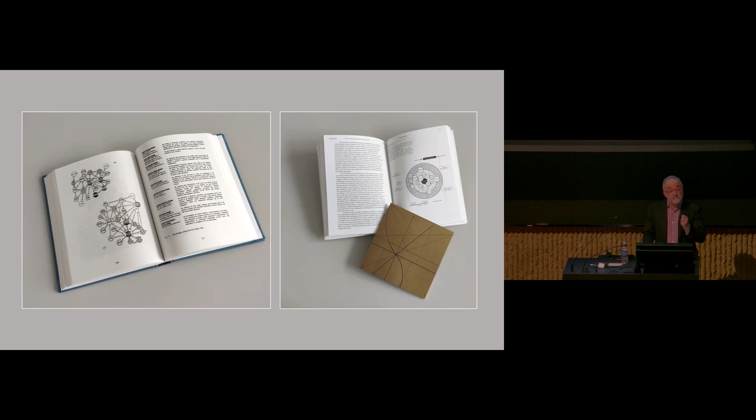So while closing the loop that I opened 30 years ago, I really want to take this opportunity to thank Gordon Smith, I think a kind person and a true patron of academia, who's also responsible for my being here today, not only because of the sponsorship of the event, but I think through the generosity of spirit that he has shown in other seasons of our life. So thank you very much for what you've done for me before this event.

Now, we go to today's event, the anniversary of the Sydney Opera House, 50 years since its opening by Queen Elizabeth. And I'm going to use these 3 nouns, cells, octopuses, and beds, to provide you with a slightly alternative view of the greatness of this building and its significance in the history of architecture and construction.

What I'm talking about is a building that started its proceedings in 1956 after a competition was organized by orchestra conductor Eugene Gossens. That is the rendering of the maquette that was actually provided to the participants in 1956, what Gossens envisioned for Bennelong Point. Jorn Utzon wins the competition in 1957. 1959, ground is broken on Bennelong Point, and 15 years later, Queen Elizabeth II opens the building on October the 20th. So 50 years last week.

Between 1958 and 1973, there have been 3 stages of construction which essentially materialized the building. The first for the podium, 1958-62, the second for the superstructure and the sails, and the third for the glass facade and the interiors.

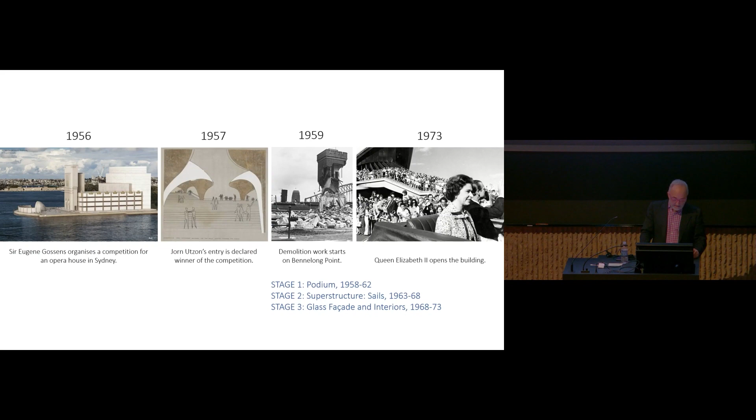Since the opening, but even before then, the Sydney Opera House had really become a very powerful signifier, a very powerful symbol of the country, and actually a mirror of its society, from latest fashion trends to societal events like the latest COVID. And so here you see the Sydney Opera House appearing on the front page of the Sydney Morning Herald during lockdown.

Now, in 2003, the day in which the entire nation was glued to the television because of the start of the Iraqi conflict, 2 social activists climbed the ridge of the Sydney Opera House to write "No War" on the sails. They were later convicted, 6 months in prison, $151,000 in fines, but they said in an interview only that building could have conveyed that message to the rest of the world.

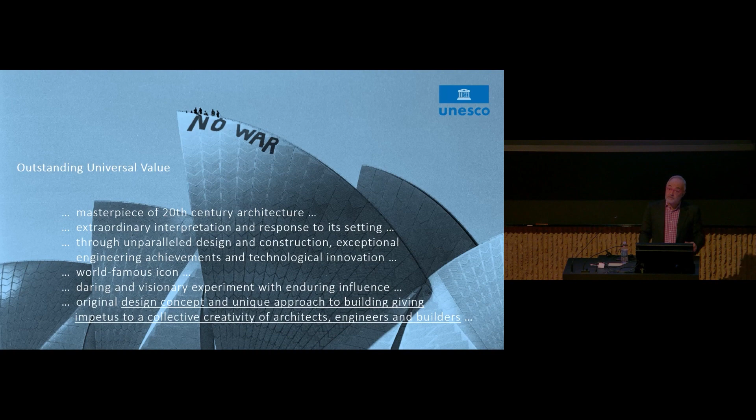So be that as it may, 4 years later, in 2007, UNESCO decided to inscribe the Sydney Opera House into the list of World Heritage Sites. And the outstanding universal value that had to be declared in order to make it worthy of such an honour contains a number of truisms and motherhood statements, but there is a last one which says original design, concept, and unique approach to building that gives impetus to a collective creativity of architects, engineers, and builders. And this was an interesting thing to find in a building which was listed as World Heritage.

Now, if we look at the various protagonists of this story, we have Jorn Utzon, the architect for stage 1 and 2, Ove Arup, the British structural engineer that was the engineer for the Sydney Opera House, as well as the project manager for stage 2. Then Peter Hall, the architect that replaced Jorn Utzon for stage 3, the interiors and the waterproofing of the building. And then Sir Manuel Hornibrook, an Australian engineer and general contractor for stage 2 and 3.

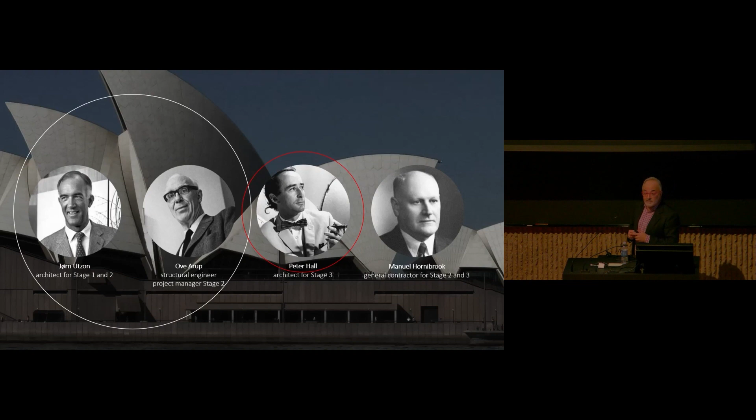If we look at the public history of the building, there is a lot to know about Peter Hall, the architect for stage 3, given his very problematic relationship with the project, and given that he replaced Utzon. But when it comes to the relationship between architects and engineers, it's Utzon and Ove Arup that steal the stage. So they take front stage. There is almost no mention of Manuel Hornibrook. This is a man, a company, that's been almost excised from history.

There is, however, a certain proclivity on the side of architectural commentators and culture to look at the Sydney Opera House, as well as any other building, as a masterpiece, a piece that is the creation of the master. So here you can see the most incredible exemplification of that. This lighting of the sails is something that comes up every year in Sydney, on the Sydney Opera House with laser beaming.

And as part of the annual Vivid Light Festival, there was this drawing that was projected on the Sydney Opera House, which is a fake. And it is a fake because it has Utzon's signature on the right, but in fact it has an Ove Arup drawing right in the centre. Utzon never produced that drawing. And so it's part of this particular paradigm.

Now, the things that we're going to talk about today come from a multi-year research project that I've been carrying out for the last few years with two colleagues of mine, Paolo Stracchi from the University of Sydney and Luciano Cardellicchio from the University of New South Wales, together with other people. If anyone is interested in the literature that we produced up to this point, there is a code there, and you will find everything that has been published.

Now, the problem and the holy grail of this particular project is drawings. It's interesting that with the Sydney Opera House, 25 monographs have been produced so far. If you open them, there are no construction documents. So the construction documents of the Sydney Opera House for a long time have not been known. We know the construction drawings of constructions at stage 3. We know the construction drawings of particular packages. We know Utzon sketches, but until very recently, we didn't have the construction drawings.

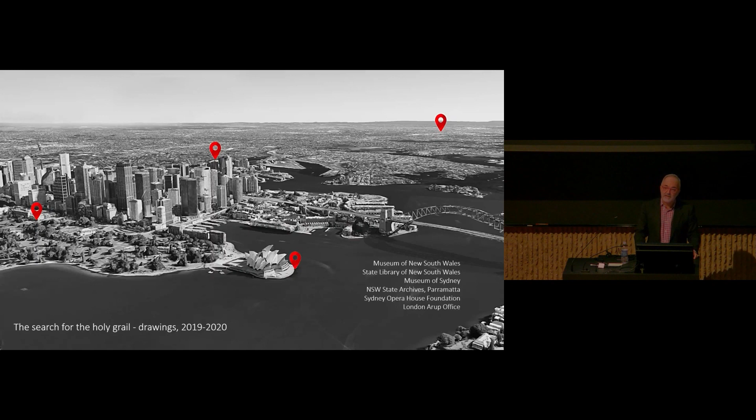So the great idea that Jorn Utzon came up with in order to resolve the structural problems that had beset the resolution of the sails of the building for 5 years, from 1957 to 1961. Essentially, he decided to move from free-form shells to ogival vaults with radial ribs by turning all the main shells into curvilinear triangles formed by ogival arches that stood on one vertex, in fact, on two vertexes called pedestals, if you put them together. So all triangular sectors of the shells belong to the same sphere.

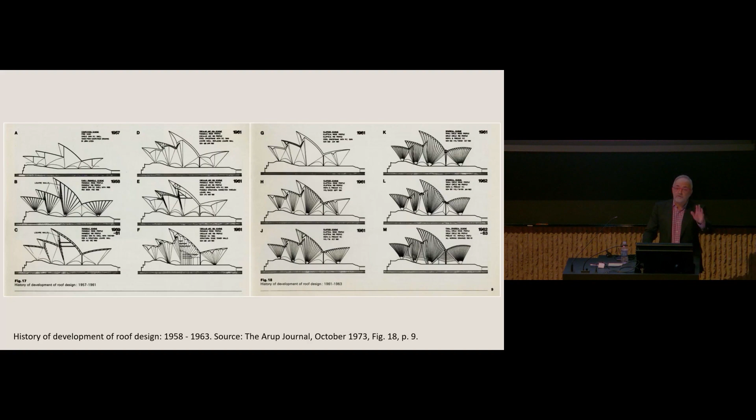In a 1973 report, the first great research report produced by Ove Arup at their office in London, they produced the series of structural solutions that had been adopted between 1957 and 1963. And here we're talking about the last one, essentially, L and M, but more M, that in fact shows how the structural logics of the building changed, notwithstanding this ostensible simplicity that was added to the project.

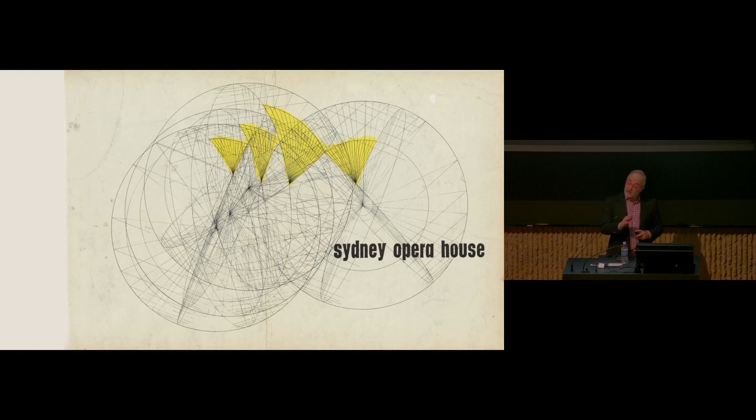Now, Utzon produces this particular solution in January, publishes the solution between January and March 1962. This is the famous yellow book, the cover page of the document that was given to the New South Wales government. The drawing, one of the most famous drawings in the history of 20th century architecture, was actually made by a very young Rafael Moneo. 23 years of age, he spent 6 months at Utzon's office in Hellebæk. Without ever going to Australia, this is Rafael Moneo's work.

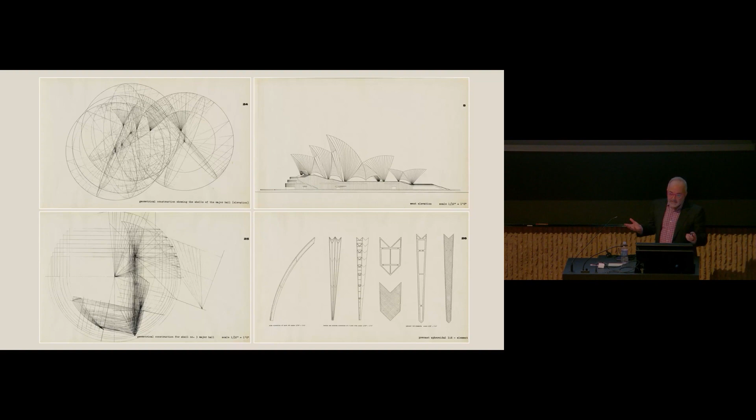In fact, if we actually open up the yellow book, which consists of 42 drawings, we have 3 to 4 drawings that relate directly to the spherical solution. I put 3 here, all the work of Rafael Moneo. These are 4 drawings that Rafael Moneo produced in Utzon's office, plus an elevation of what the Sydney Opera House would look like according to the solution. Notice that the sails are very, very visible, but not the other parts of the building.

So whilst they didn't put much time and energy, I would say, into the production of that information, at least until that point in time, Utzon did some very good shrewd marketing work. The first one was a documentary for the Danish television, and another one was an interview with the Australian Broadcasting Corporation in Sydney, in which he explained essentially the topological and geometrical logics of the sails. And he says, we're going to do this by building a factory on the site to produce these ribs. Only one form, divided into smaller parts, is actually necessary. The forms are movable to enable us to mass produce segments.

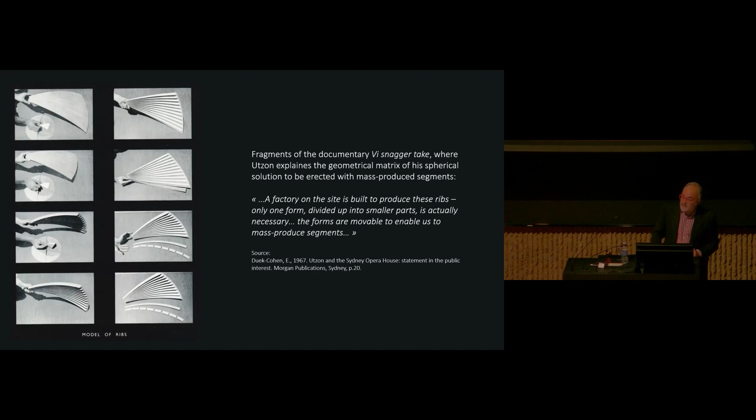And so while Utzon, in a sense, communicated this idea and made it become a founding idea of the history and the mythology of the Sydney Opera House, it was Arup that took over the production of the drawings in order to define the anatomy of the building and its various pieces out of this idea. And in fact, these are some of the drawings that they produced, not so much the central one, but the other ones to the right, in which you can see the initial complexity of all the components. There are dozens of these drawings.

I'm not going to show them to you because there would not be enough time. I just show you this particular drawing, which is in fact the one that was erroneously attributed to Utzon in the public event at the Sydney Opera House, which is an incredible drawing done by Arup, in which architecture, structure, and eventually the fabrication of the components come all together.

Arup spends 2.5 years between 1962 and 1964 producing most of the documentation, but at the same time, he needs to talk to the constructor. And so Arup convinces the government to bring in a particular contractor by the name of Hornibrook Company, which was a builder of bridges in Australia and some of the most famous segmental arched bridges at the time. Why did Utzon need a constructor at that point?

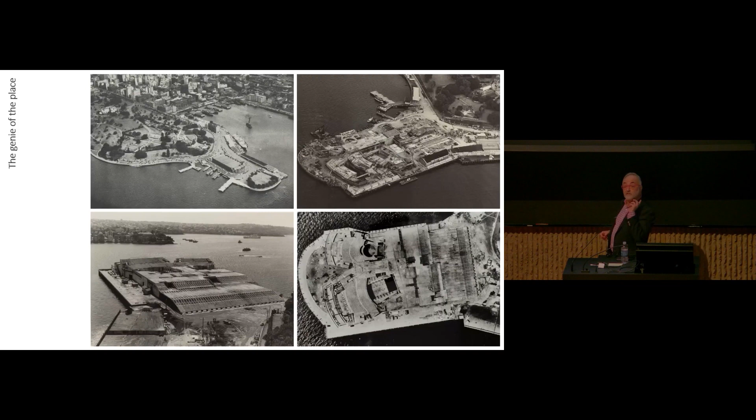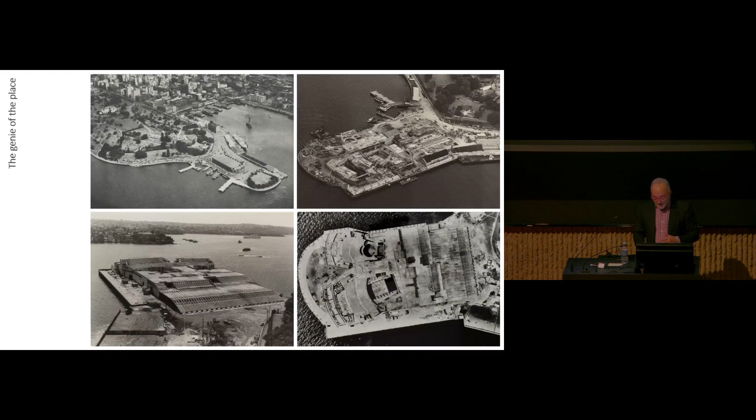In fact, the first contract that Hornibrook got with the engineer was that of the design consultant for 4 months in London. So the contractor went to London in Arup's office to talk about the design of the construction site. The reason why they had to do it is because the genie of the place was very, very difficult, in a sense that Utzon decides to use the first stage with the podium and the program of the building to build the topography of Bennelong Point. And once it built the topography, this podium of Mayan origin, as we all know, there is not much space left to actually build the sails on top of it.

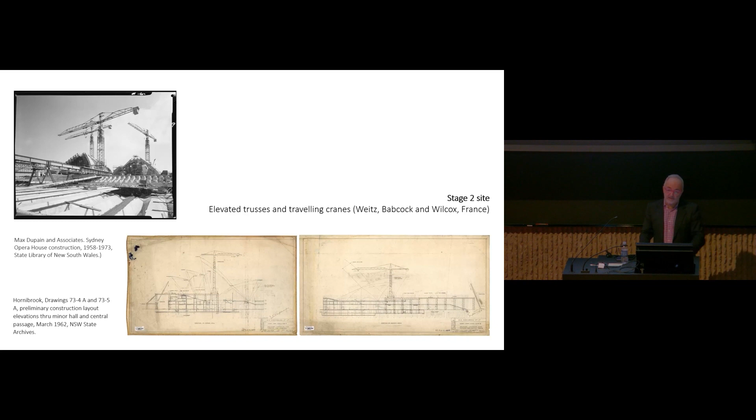And in fact, Arup calls Hornibrook and asks him to devise a strategy to build on that. And Hornibrook starts by treading very, very lightly on the construction site by proposing a Y-shaped system with the elevated truss and the traveling cranes. They go to France, get 3 tower cranes, the tallest tower cranes in the world, and they bring them to Sydney. Here you can see 2 images, 1962 roughly, of the organization of the site with the I-shaped 3 gantry rail tower organization of the cranes.

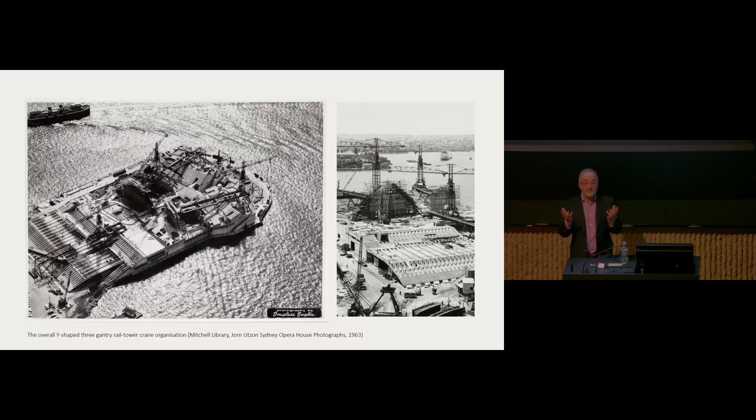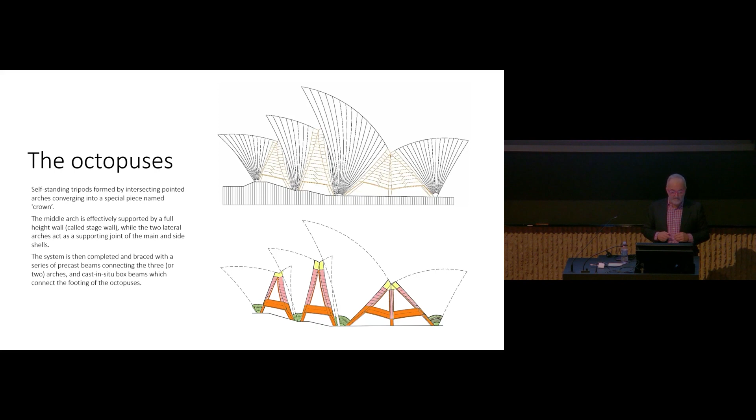Now, this photograph is interesting because everyone is waiting for the Sydney Opera House to emerge out of this podium. And in fact, what you see here are 2 walls, 2 strange walls that sit right in the middle of the site. And the reason why they are there is because they are the most important part of the Sydney Opera House. They're called the Octopuses by Arup, whereas in the vocabulary of Utzon's office, they still remain the side shell. But they are self-standing tripods that are formed by intersecting arches that converge into a special piece named crown, the one in yellow in the photograph.

The middle arch in the double A is effectively supported by a full-height wall, the 2 images that you saw in the other image, and the other lateral arches actually act as supporting joints on the main and side shells. So everything falls onto the Octopuses. Then the system is completed with a series of pieces that are precast or cast in situ. A very complicated scheme that somehow doesn't respond too well to the idea of industrial normalization that had been made public in the interview.

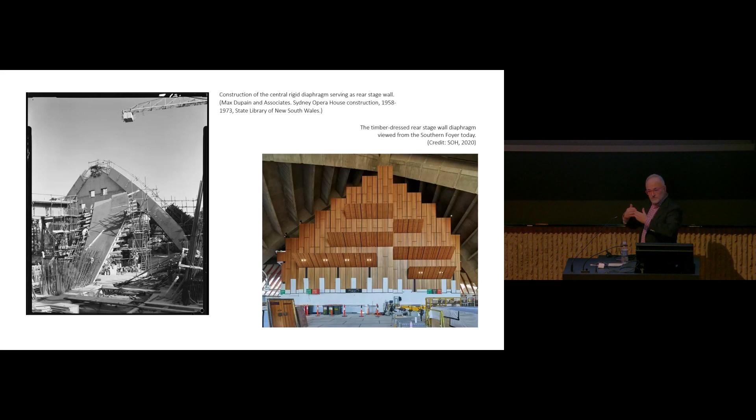So the one on the left is the image of the wall, and the one on the right is the image of the same wall, which is completely concealed from view today. Also because there's a very, very smart typological arrangement, and so it becomes the stage wall that divides the foyer of the building from the actual concert hall.

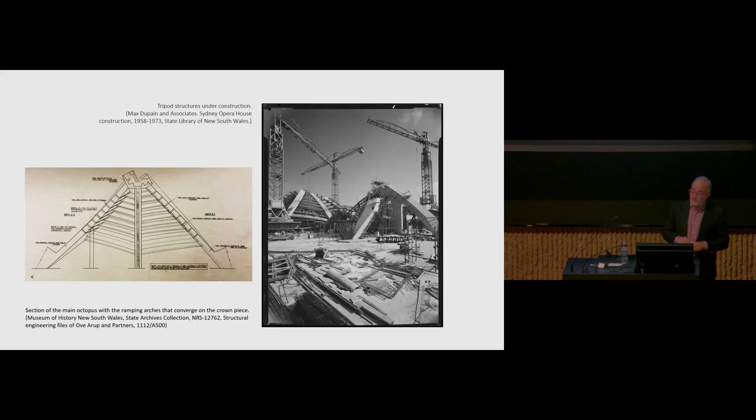Now, that first year is actually spent trying to put the tripods together. The tripod, and particularly the main one, is on the critical path of the project. If you don't build that one, you cannot build the Sydney Opera House. And so there is a lot of energy that is spent doing that. Even Peter Rice, as a young engineer, works at the resolution of this particular problem. So much so that at one point, it's starting to build some pressure, and they put a column onto the sort of bending arch to the left.

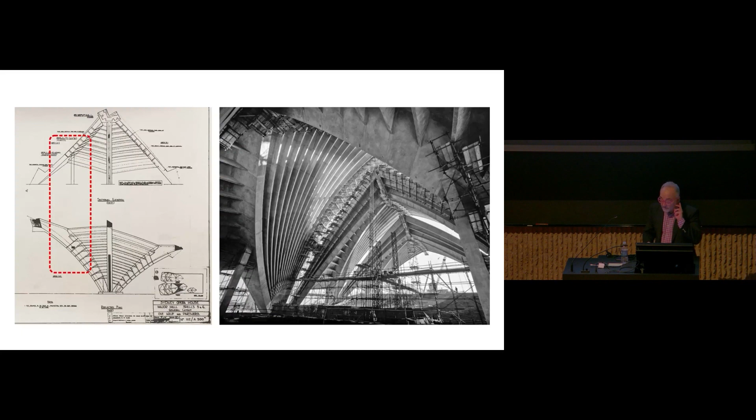What you can see here is the complexity of this particular element with the octopuses that are right above the column. Then you have the ribs, and then two other octopuses that you can see in perspective. To the left, you have the drawing by Arup when Utzon was already in control of the project, with one of the four invisible columns.

Now, if you start building that one, we also have to start understanding not only how to support the arch, but how to pile up all the components that are the precast components of these arches. And these arches are a very, very difficult form, because what Utzon does but doesn't say is that, in fact, the spheres from which the various sails are taken out have different centers.

And so when you put them together, they don't comply entirely planarly, and so you have to produce a warped arch. On one side, you have the normal spherical surface. On the other one, you have another spherical surface, and the various components of the arch need to twist as they go up.

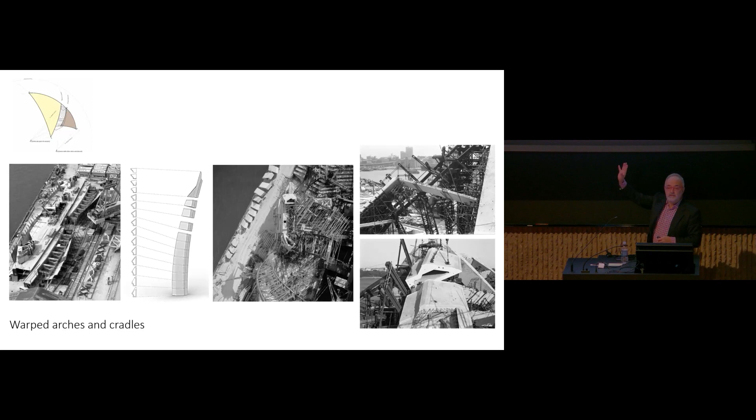So, in fact, you can see here the precast components set up by the building contractor. You can see them organized. I don't know if I can do this. Well, you can see them right by the end of the harbour, and as they are built up on the central image. On the other two images, you see the incredible amount of complexity that the contractor had to go through in order to take a precast component which had one side which was constant and the other side that would actually change.

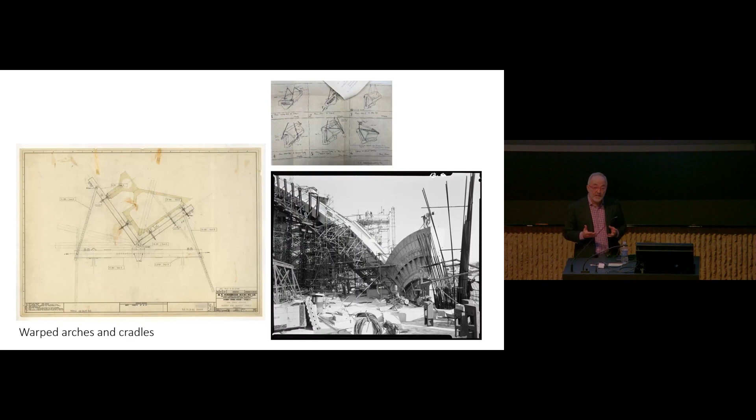So they set up this particular system called cradles, and this is a drawing by the building contractor, a system that goes up on this steel trail, and then as it goes up, one side of the cradles changes the angle. You can see it can be organized at the beginning, and so it changes the shape of the cradle. On the top element there is a drawing done by the contractor, Hornibrook's drawing, that studies how these various things can be lifted up and turned in space in order to be put on the cradles.

But that's not enough, because once we do that, we have to understand how to prop it up, how to support the arch during its construction. And in order to do that, we need to produce some telescopic props, because the building site of the Sydney Opera House is still open. We have the podium with all the functional programs. We are building the sails, but we haven't built the theatre yet. And so we have these big gaps in the section of the podium, which you also need to use in order to prop the arches up.

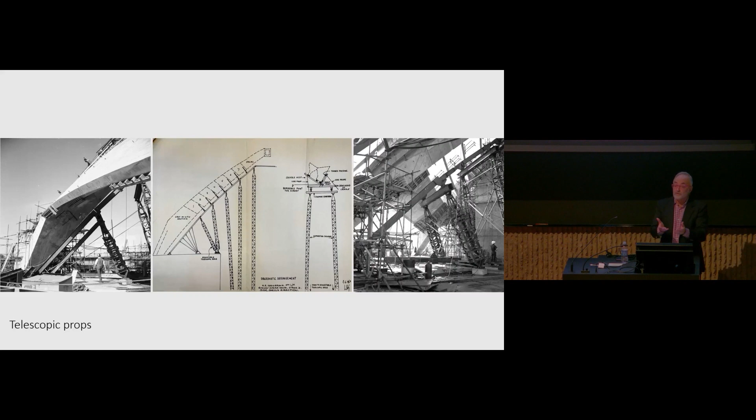And so here you can see the telescopic props that were invented by the contractor with a series of joints that I'm not going to explain here. It will take too long. There is a reason why I'm doing this in this way and going this fast, so bear with me.

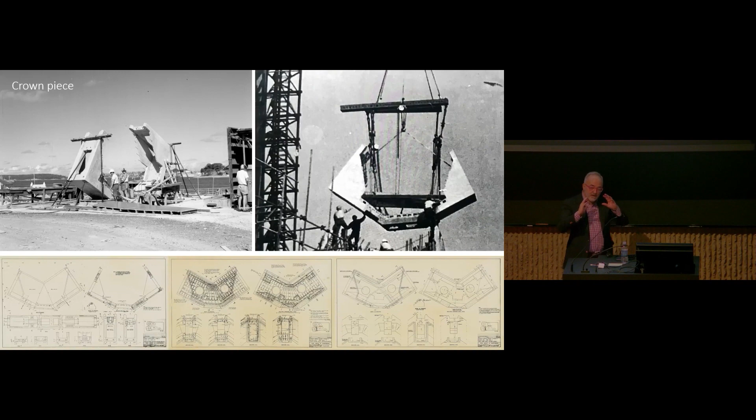Once we do this and we bring up the arches, then we have to bring them to a conclusion with the crown piece. And the crown piece is an interesting one, because on the one hand it becomes the element that brings all the four legs of the arches together. On the other, as a precast piece, it becomes the sacrificial formwork for the cast in situ pour that will allow all these arches to be brought together and become cohesive from a structural point of view.

So you can see here not only the precast element of the crown and the moment it is actually lifted in place, but also the drawings that Arup had to produce in order to define the main profile with the sacrificial form, then the reinforcement of that form once put in place, and then the position of the tensioning once the entire thing had been done.

Now, I've done this in order to give you a sense of the pressure that all these people were being subjected to for the 2 years that it took to produce the various octopuses, because it was one problem after another, and we were going on a very, very tight schedule. The other thing is that none of this work is visible today. So this is work that was preparatory for the sails, but it was not part, if you will, of the architecture.

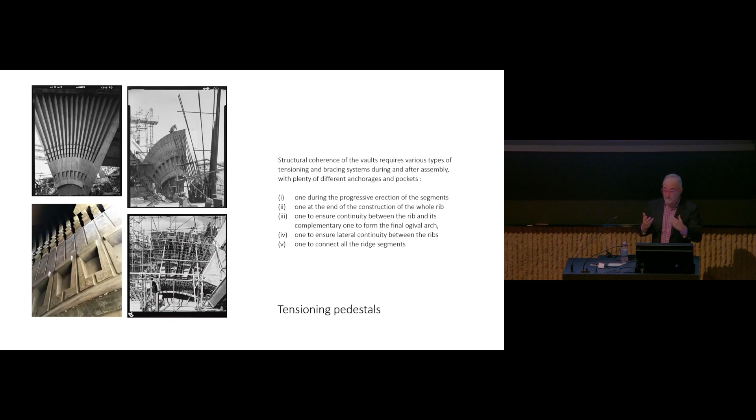Now, the other thing, though, is that it's not always the case. So there is a large part of the work of these people, the engineer, the contractor, that has very much become visible today and defines our experience of the building. And that has to do with the pedestals that are part of our experience of the building as we walk through. The structural coherence of the vaults does require that tensioning and bracing systems are put in place during and after the assembly. And so that produces a variety of different anchorages and pockets.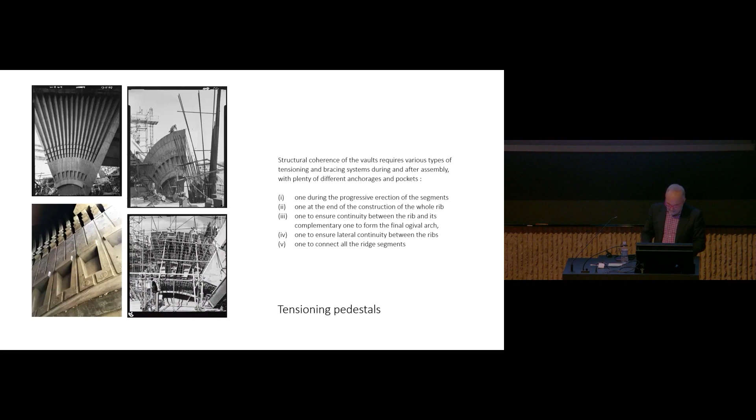And so, in fact, these pedestals that ideally are only there to support the ribs of the arches, in reality need to acquire a textural finesse that responds to all the structural needs of the building. And so here, Arup, but as well the contractor Hornibrook, need to produce an incredible amount of drawings, very, very specific, in order to describe every little hint, nook and indentation that appears in these places.

If you want to see the difference between the elements under construction and today, well, the colored photograph is what you see today when you visit the Sydney Opera House, and the other photographs are under construction.

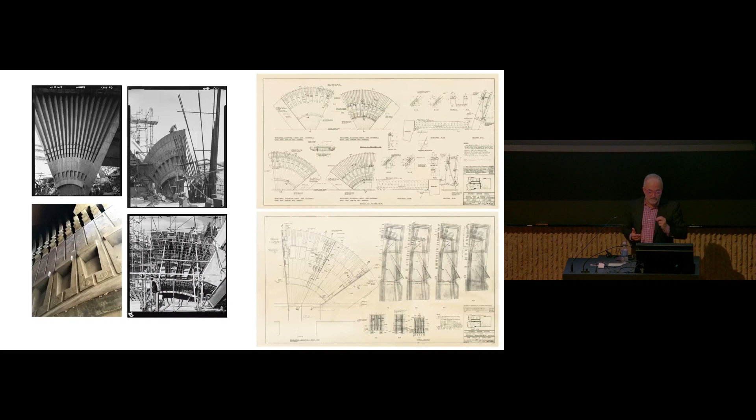Now, it's interesting because our experience of that space is based by and large on these things, the reasons of which are essentially structural and constructional. The same thing happens for our experience of the octopuses, and also the way in which the ribs go all the way down to the ground, essentially for the same reason.

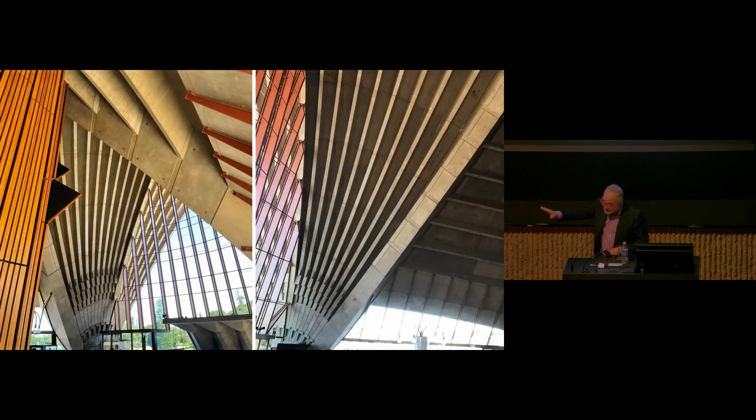They need to be post-tensioned, and so we need to find the way to bring them all in and find ways to jack them up and tension them. And in fact, when you go today to the Sydney Opera House, not only looking at the pedestals, but looking up, what you see is the work of the people that built it.

There are essentially no drawings done by Utzon in order to detail this particular work. We do have sketches which we have found where Utzon's office, in a sense, approves some of the work, but this work comes from a different walk of professional life.

Then there is another component, which is the invisible component that has to do with the structural stability of the shells. The vertical one has to do with the system of spigots and vertical contacts that the contractor put in place in order to make possible the epoxy fixing of the various segments before post-tensioning.

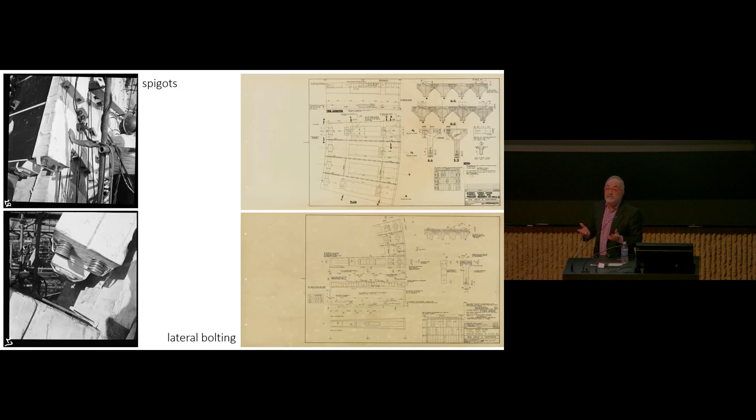But also we have the lateral bolting that Arup considers to be necessary for the structural stability of the place, which in fact will produce an enormous amount of complexity in terms of the casting of the pieces, as I will show you in 5 minutes.

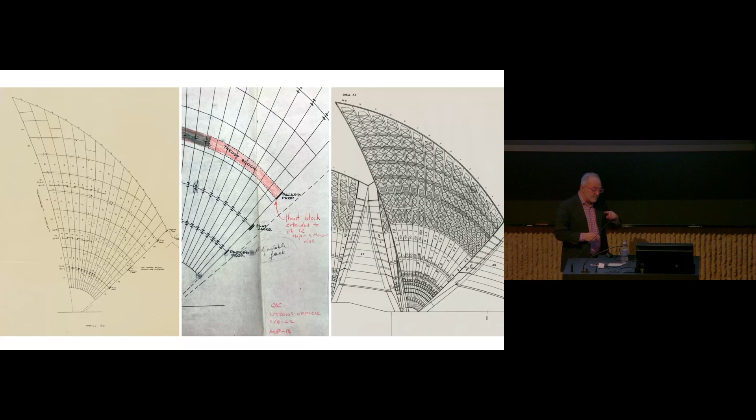When we go and look at some of the other drawings that are produced in that respect, we can see the second proposal for the lateral bolting of the radial segments in 3 or 4 paths along the height of the sails. Then we have in the middle something by Mogens Prip-Buus, one of Utzon's right-hand architects, Utzon office in August 1963, and then eventually all these pieces find their graphic representation in Arup's working drawings. So here we are.

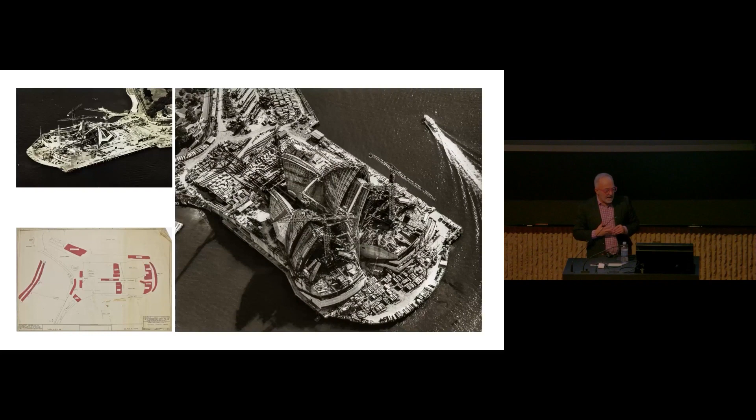In 2 years, we go from the construction site, which is organized on this Y-shaped gantry system, with the layout of the building materials as imagined by the building contractor, to a site which is becoming more and more saturated with stuff. And so here we have to take a decision on what it takes to build something which is made out of a series of microsites, because all the octopuses produce microsites of their own, in the sense that they need their own scaffolding, their own propping,

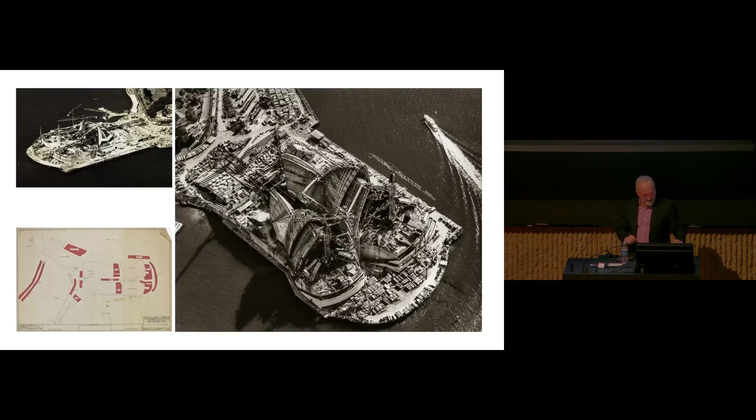operations. And then you have the sails that need to come up from the podium, as a miracle of tectonics. And so in order to do this, everyone goes back to the solution that the contractor had imagined in the very first place in 1962, which is the use of the gantry system and the use of the pedestals, and only the pedestals, for constructing the sails.

And so here we arrive at one of the most incredible pieces of machinery in the history of modern architecture, which is the erection arch. A radial, movable centering that can follow the shapes of the ribs being built under any temporary configuration, thanks to a telescopic mechanism that provides space for the progressive insertion of the precast components I'll show you.

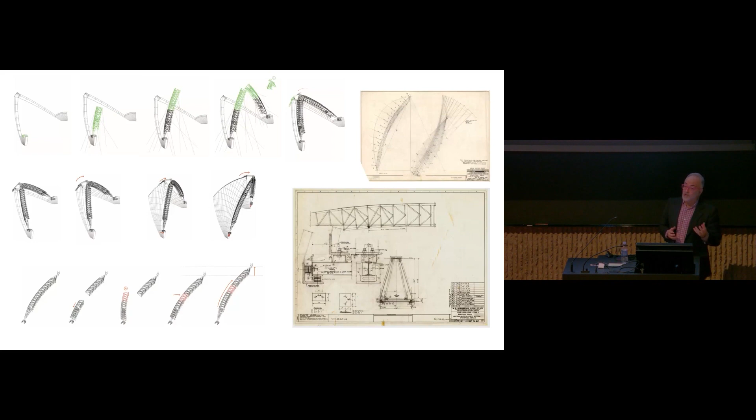The arch was actually invented, documented and structurally calculated by two people at the contractor's office: Corbett Gore, the general manager in charge of the Sydney Opera House, and a French engineer, Joseph Bertony, with a very, very adventurous life in France, in the concentration camps, as a submarine pilot. These are the drawings done, I think, by Bertony, particularly the drawing at the top.

If we want to see how the sails of the Sydney Opera House were actually built, starting from the octopuses, we do this.

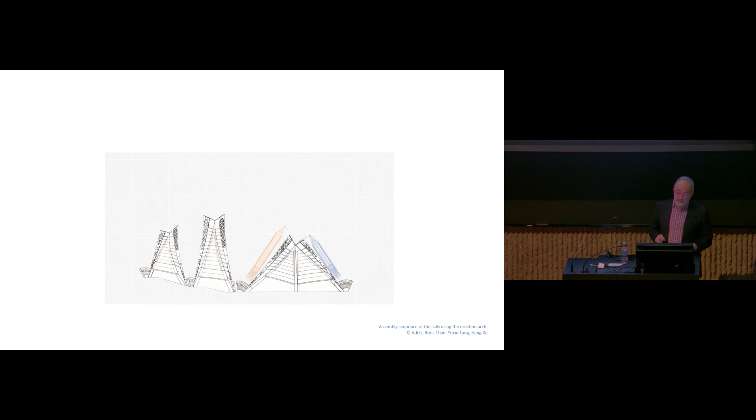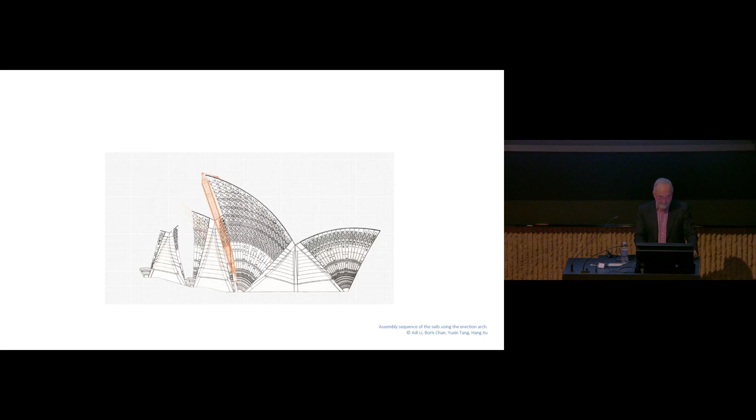And one fell down. This is thanks to the students of Paolo Stracchi in Sydney. Anyway, you get the gist of what I'm trying to say, okay?

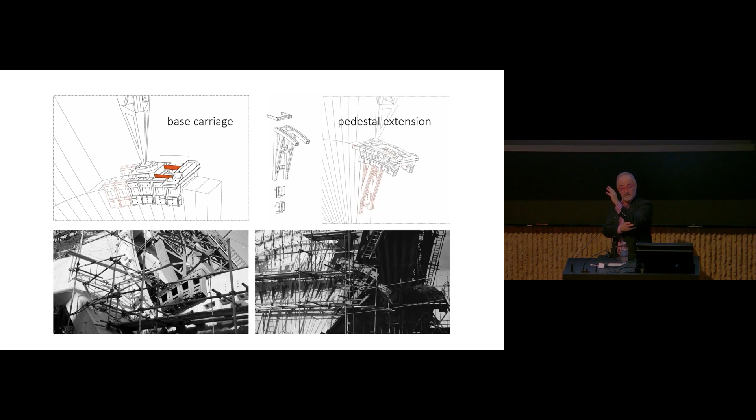So, the problem is that it's not just a matter of making a diagram that does little, funny movements along an axis, but rather to actually detail all the components of this particular thing. And so you imagine that in order for this arch to move in this way along a circumference from one particular point, he needs to have a carriage, a base that can actually move and allow it to move progressively, rib after rib. They can't move the arch. The arch must be pinned onto that base.

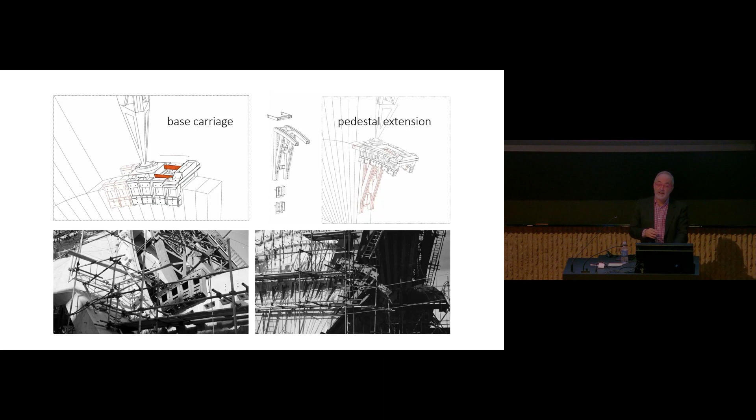And at one point, given that the arch has to make space to get the last piece, the rib is finished, therefore the pedestal is completed, but the arch needs to be standing on false work, because otherwise there is no way to mount the last piece. And that's why they invented the pedestal extension there. So it is something that allows the erection arch to go off the line of the pedestal in order to complete the building.

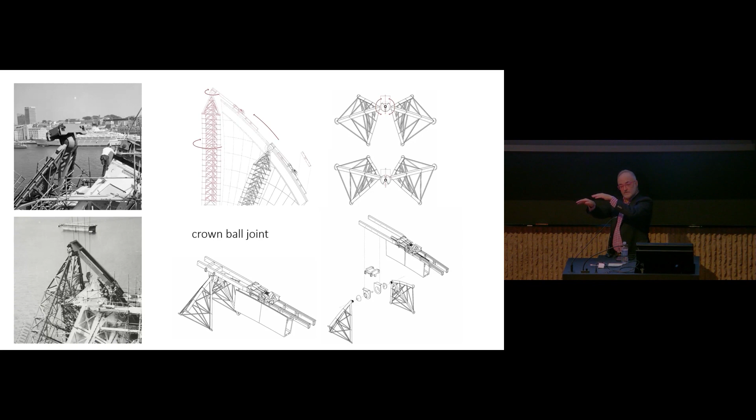The other thing is that with this erection arch, once you start moving along, the sail has a curvilinear spherical surface. So that means that the arch must do this and move along the ball joint. Otherwise, it will go straight. It will not be able to cover the entire surface. So there has to be a joint that allows the arch to move in this direction, but there also needs to be another joint on top that does something else, because the arch, as it moves up, goes further and further from the next piece, because the pieces taper out. And so even this thing requires a systemic view of all the drawings, all the parts of the building, and above all, the documentation of this.

Last but not least, we have the needle beam. So the elements that allow the segments that have been precast to be attached to the erection arch on one side through the needle that we have near the lattice of the arch, and then you need to block it on the segment of the rib that is available in such a way as to be able to insert the segment into the space that has been made available for that. And this is the systematization, if you will, of that.

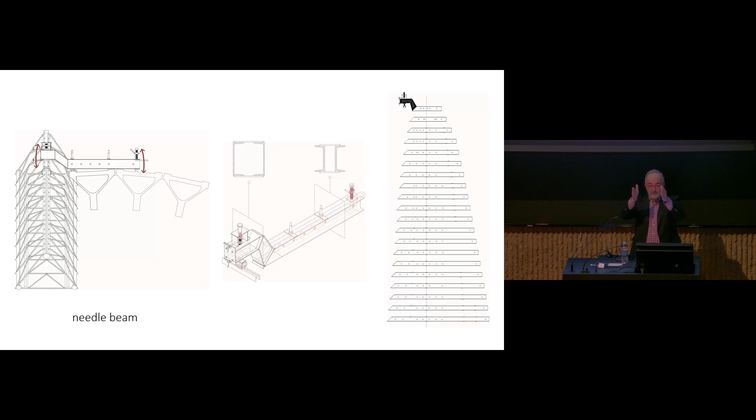So they organize it in two pieces in such a way that you have the piece that attaches itself to the erection arch, which is always the same. And then the other pieces that have to attach themselves to the segment of the ribs that taper out, that need to change width, because otherwise it can't actually reach and attach itself to it. And these are the images of the pieces with the needles attached, and once they're attached, how they've actually been put onto the sails.

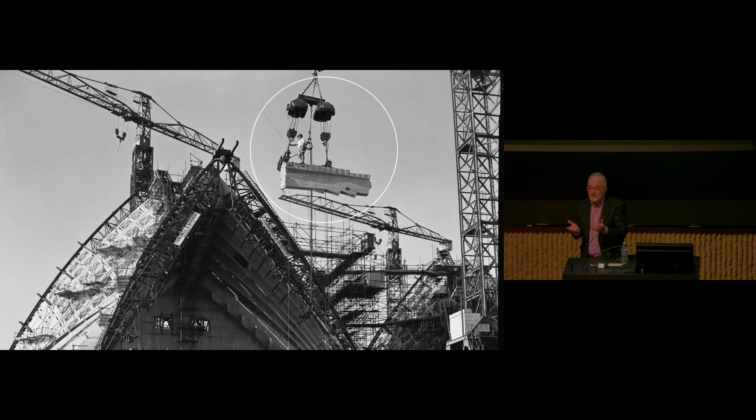Now, last but not least, the pieces. What are we going to do? How are we going to make the pieces of the Sydney Opera House? And here, the contractor has a great role to play. From the very beginning, he starts on the side trying to plan how to organize the very little space available. And these are the parameters he has to use in organizing production. They need to produce 2,500 precast segments: cambered, double tapered, dimension bound because of the site, weight limited because of the tower cranes. They need to be lifted, scaffoldable, post-tensionable, and so on.

And so in order to do that, they organize a casting yard with a series of elements called beds. They organize 9 beds, sometimes 10, but essentially 9 beds served by 2 central spine cranes, and each bed produces specific pieces. Each rib of the Sydney Opera House has up to 13 pieces, and those 13 pieces contain 3 types of radial segment: full, hollow core, and void.

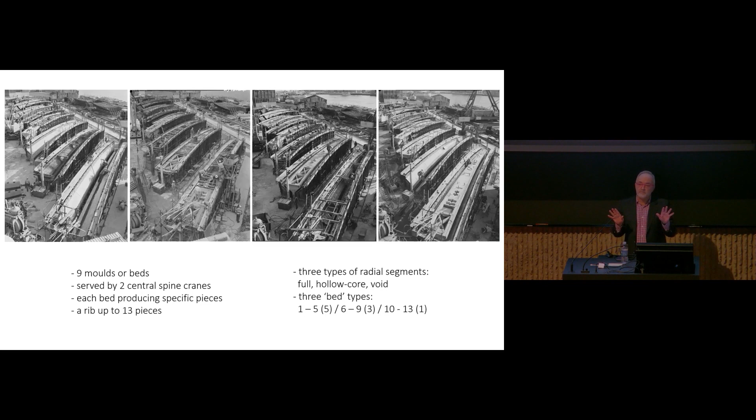And the contractor organizes 3 types of bed for that: one from piece 1 to piece 5, one from piece 6 to piece 9, one from piece 10 to 13. Because the Sydney Opera House has shells or sails of different size, not all the pieces need to be produced in the same way. So in fact, the number of beds on the casting yard is directly proportional to the number of pieces that need to be cast.

In order to be precise on this, we need to make sure that everything is going to fit, each piece going to fit into the other piece. So anytime that there is one piece 1 to 5, the piece number 5 is actually extracted from that form and becomes the first piece of 6 to 9 in such a way that there is a seamless connection between the two. And that's what you see in this photograph and the drawing done by the general contractor to show how the temporary formwork for that piece must be put in place.

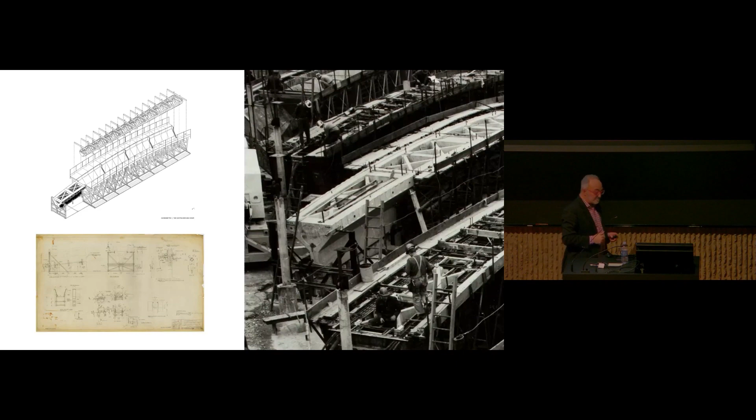And these are some of the many drawings produced by the general contractor to make that particular thing possible. Here we have a clear attempt to systematize production also by responding to the various parameters that are made necessary from the form of the sails. So you have mechanized casting beds that facilitate the stripping of the forms. You have adjustable inner formworks that allow us to use exactly the same formwork when the various elements change in size, and also adaptable cross-bracing forms for the top of the larger segments, because given that the rib changes in width, even the bracing must change.

And all this is done in such a way not to complexify things, but to make them simple in such a way that the forming, the pouring, the stripping, and the mounting of these pieces can be as seamless as possible.

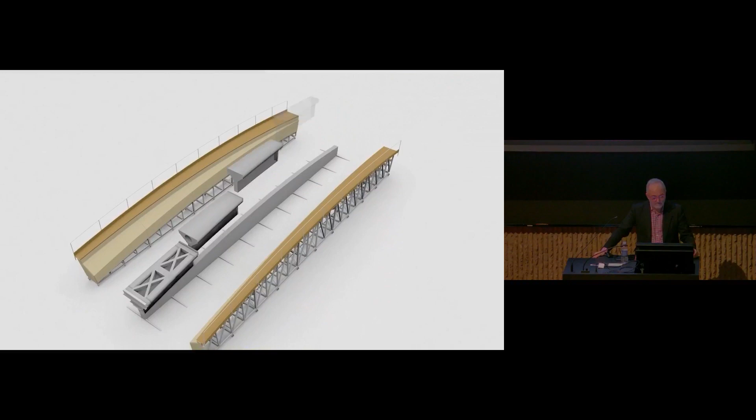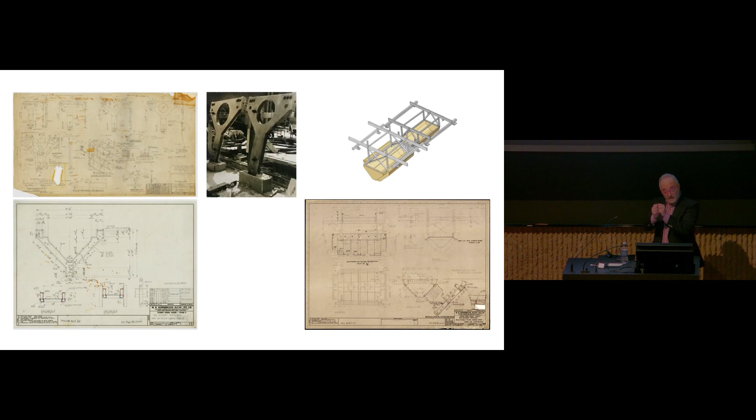So you can see the inventiveness and the complexity of the system. So of course it requires a series of micro projects and micro design to be inserted into the formwork. So the form or the bed is one thing that looks very efficient, but in fact it's something that requires the invention, the design development, and design resolution of a number of pieces, such as the bulkheads, for instance, that separate one segment from the other. You can see those two drawings there, or even the internal formwork, which in the drawing right above me also has the mechanism to stretch the size of the formwork in order to respond to different sizes of the segment.

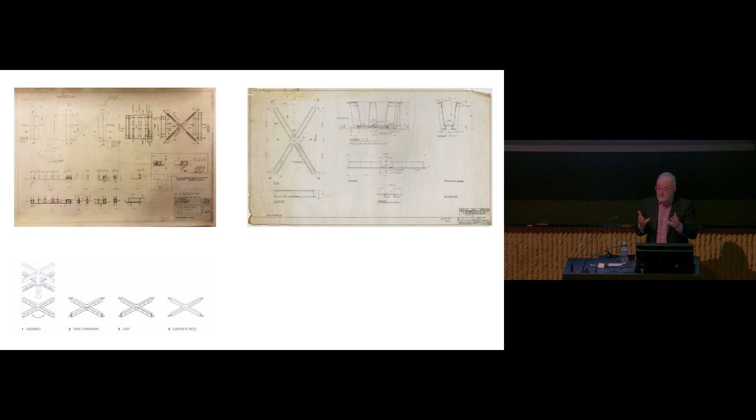And then here, Arup decides that in fact the cross-bracing is one of the most important parts of the larger segments, because you have to understand that we still have tower cranes that can only take up to a certain weight, considering the radius of the crane. And so there is a desire to lighten the very components as much as possible by providing this bracing on top of it. So here you see the drawing by Arup and the response to that particular drawing by the general contractor, how they're going to do the

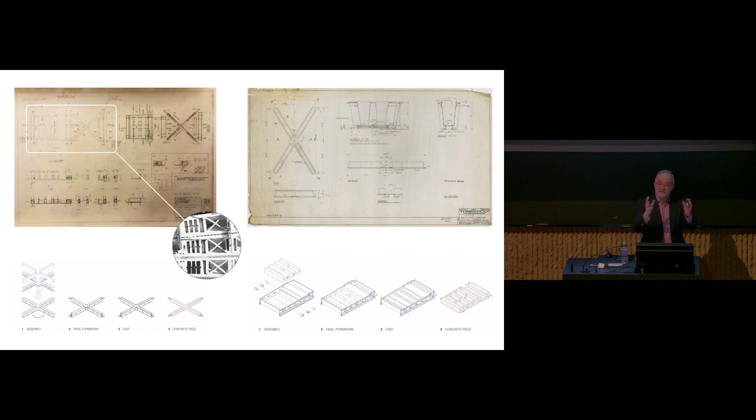preparation of the formwork. And then here you have Arup that decides, because of the lateral bolting, to start putting together one or two segments that do particular things. And in response to Arup, these are modeling simulations done by my colleagues. And so the general contractor has to produce a casting system that responds to Arup's requirements.

Now, why have I said all this, and why have I said it at such a frantic pace? Because if we go back to the initial interview, and in a sense the rhetoric of the conventional narrative of the Sydney Opera House, this is a building that has actually been built on a very efficient way of optimizing the geometry of the building. So once again, a factory on the site, one form only, movable, to enable us to mass produce segments.

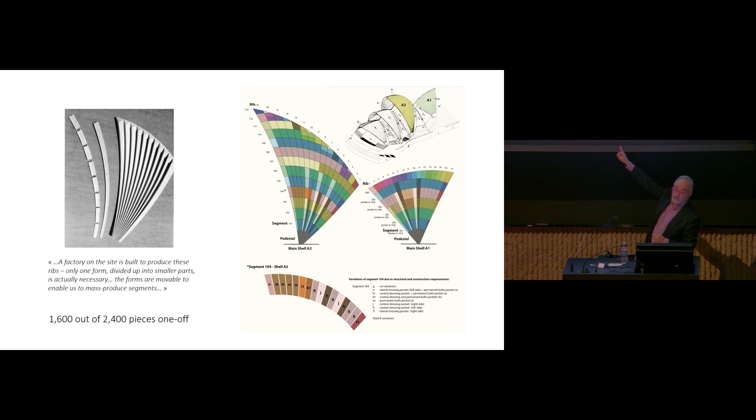In reality, this is something that the incredible patience of my colleague, Paolo Stracchi, has produced to show you the level of variation in one sail, only one sail of the Sydney Opera House. The level of variation that depends on the construction elements that you need to put in place in order to make that geometric configuration work as a building. And so here what we have is that out of 2,400 pieces on the sails, 1,600 are one-off. Okay? One-off in the 1960s, so at a time when this particular work had to be achieved through manual means.

So this thing for us is actually quite important, because it tells us how difficult it is to build something and why we should respect the people that do it. On the one hand, you have a very, very famous image of Utzon explaining the spherical solution to the public. And on the right here, you have the number of drawings that had to be produced by the general contractor in order to put the instructions in place to build those sails. I'm talking about the drawings for constructing it, not the drawings for calculating, for describing the anatomy of the building.

So in a sense, it's difficult to continue to think of this as sort of the eureka moment that an architect comes up with, without considering all the incredible amount of intellectual work that goes beyond that particular intuition to make it come to fruition and materialize it.

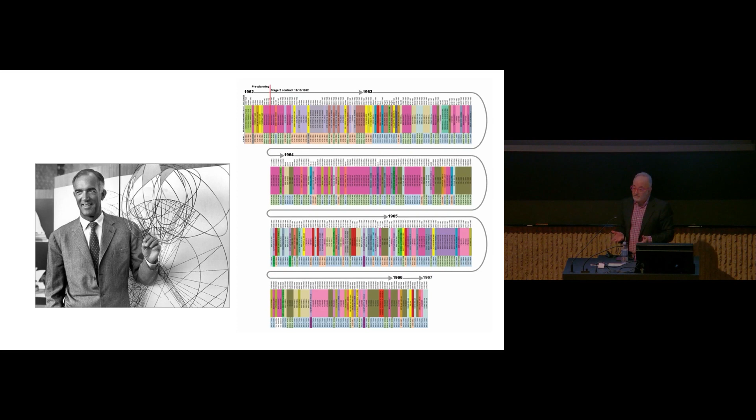Now, I can stop here with a few things that I thought I could say at the end, or give you 5 minutes of reflections on this and why we think it's important. So, Phil, we have 5 minutes? Okay. We have 5 minutes.

Why should we do all this work? This work has taken 3 or 4 years, and I can tell you the patience of my colleagues, for me, would have been already gone after 6 months. Why do we do this? And why is it important to do it?

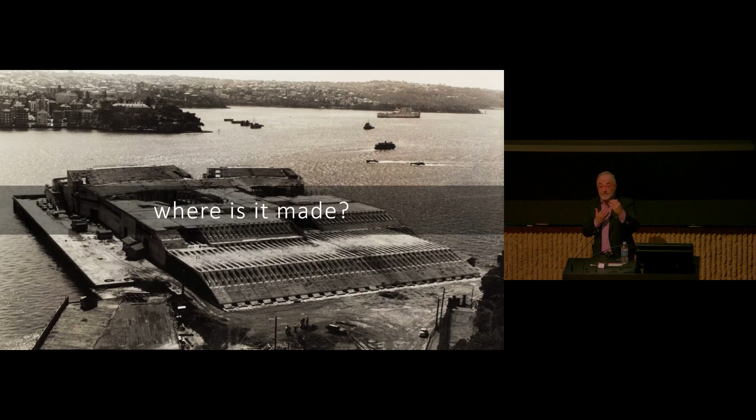And so here, of course, you can imagine that we tend to have a proclivity for the history made on site. Because essentially it's only through the history made on site that we can actually see the distance between ideas and the way in which ideas have come to fruition. And so if that is the case, what does that history tell us? What does the history that brings together the sails, the octopuses, and the ribs, or the segments of the rib, tell us?

Well, certainly, it confirms the statement in the UNESCO Declaration of Outstanding Values. There is evidence of collective creativity. I didn't coin the expression, it was just there with UNESCO, but there is evidence of collective creativity. So Utzon, Arup, and Hornibrook did bring their expertise together to produce volumes, to define the anatomy, and to decide how to manufacture the various components.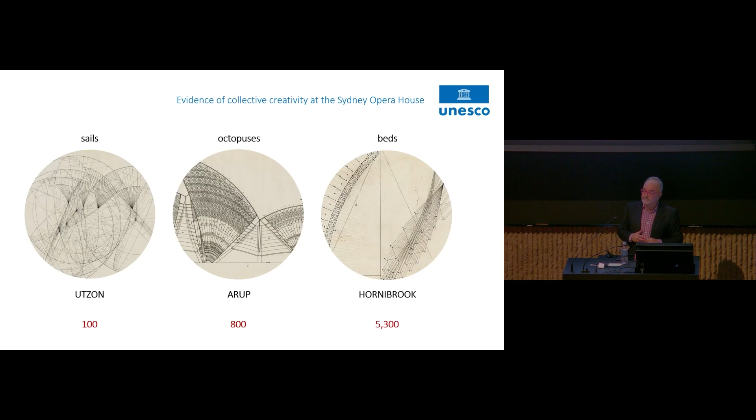With Arup, we have roughly between 700 and 800 drawings. With Hornibrook, we have over 5,000 drawings, of which I think 150, 200 were done essentially for the construction of the octopuses and the sails. So, that's an interesting issue. Where does it leave us in terms of authorship? Who is the author of this building, if we actually take drawings as a conventional way of exerting control over something and thereby stating one's authorship over the problem, over the building?

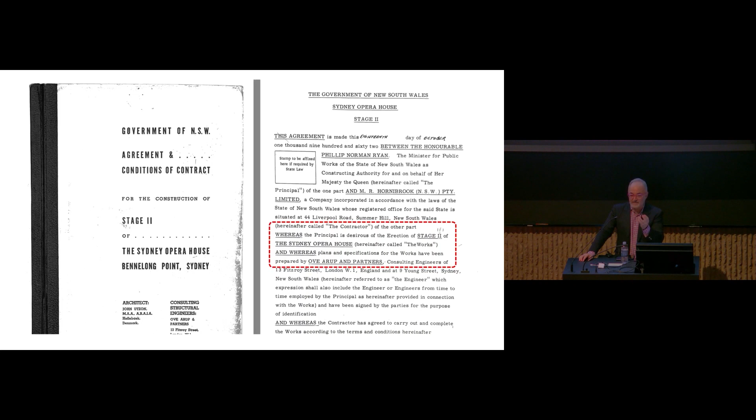Interestingly, this is a copy of the contract that was given to Hornibrook, the contractor, where it says that they'll have to take instructions from the drawings, plans and specification prepared by Ove Arup and Partners, not by Utzon. Okay? And so if we consider all of this, I think that shows the importance of architecture, because there is no doubt that the Sydney Opera House is the product of one person's vision. And what's amazing about it is that it's a building that has changed its structure, its program, its configuration, but still remains the concept, the vision, the seed planted by someone, even though it wasn't even considered in the contract with the constructor.

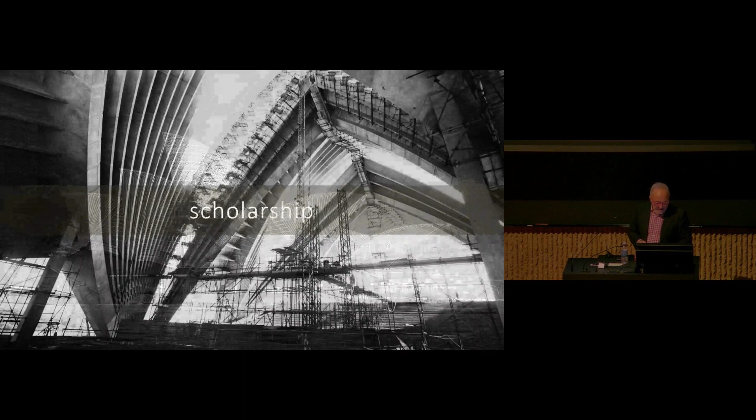And I think that the sort of work that one can do through this type of analysis, so historiographic work, is actually very important. It's better than storytelling, because it is through the analysis of this documentation that one can understand the importance and the impact of people with great ideas over the unraveling of history. Now, historiography, I think, produces scholarship. And when I talk about scholarship, I mean our ability to transform raw data into critical information which is communicable to others.

And here I also want to respond to Phil Bernstein, who during a lecture in Australia a few months ago not only called our writing a bit turgid, which is a criticism that I accept, but also said that he didn't understand my obsession with the columns of the Sydney Opera House. So, why are the columns of the Sydney Opera House important here? Why am I not obsessed, but moderately interested in them? Because what we can see here is not only an alteration and modification to the initial idea that was made out of necessity, but something that defines a structural organization of the building.

So if we don't consider those columns and we go by the conventional narrative in architectural books, in Giedion, Rogers, Pier Luigi Nervi, 1959, and so forth, we're going to put the building together in the same family as Saarinen's TWA terminal.

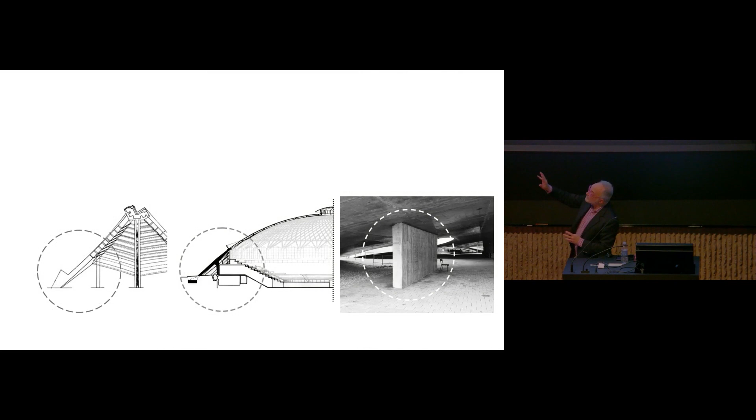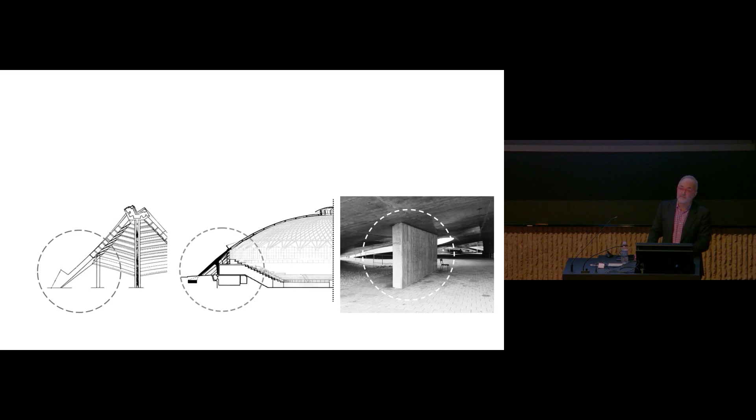What happens if we actually start considering that column? We actually realize that the solution adopted by Rice, Arup, and the team is very, very similar to the solution adopted by Pier Luigi Nervi in the Palazzetto dello Sport, and the solution adopted by SANAA at the Rolex Center where I work. That wall, there are 3 columns that are hidden away that do exactly the same thing that the column behind the Sydney Opera House does.

And so by doing that, he actually gives us a chance to reformulate families, lineages, ways of work that are not just rhetorical, but also have to do with the way in which we respond to the challenges of our work. And almost last but not least, I think that doing this type of work really helps us illuminate the past. And by illuminating the past, I mean the ability to understand what is relevant in our history, the things that would be worth preserving for the future.

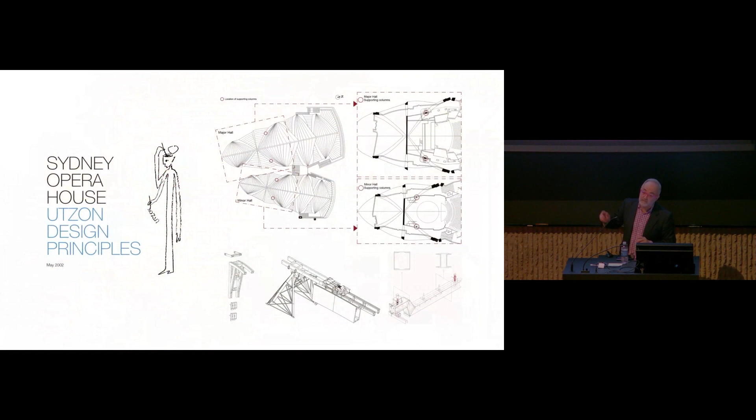So if we are concerned with Utzon's legacy, by all means, let's look at the design principles of Utzon. If we are concerned with the way in which the building evolved, developed, was constructed, then perhaps something to preserve and to put into the foreground are, for instance, those 4 columns that mark an incredible moment in the history of the building because they allowed the building to proceed, as well as all the other bits and pieces that should be at the Smithsonian, at the National Building Museum in Washington, and the Victoria and Albert Museum.

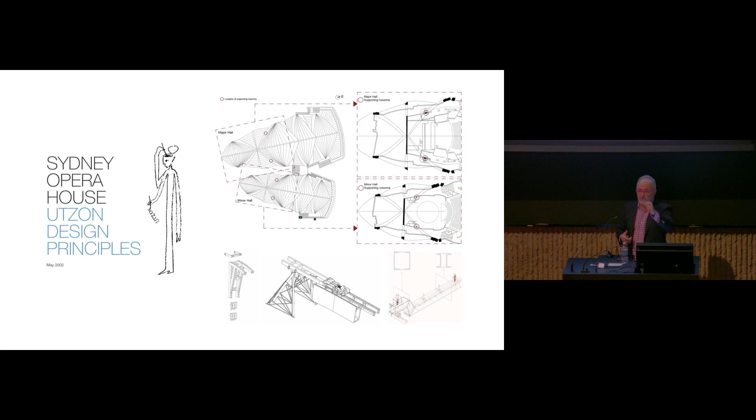And so, in a sense, what I'm trying to say is that these are important elements because they define our history. Buildings are us. And how we make buildings defines who we are as a society. And so one of the things that I want to put to you is that, in fact, it's very important to understand the relationship that might have existed at a particular point in time between Utzon and Saarinen, Utzon and Nervi, Utzon and Candela.

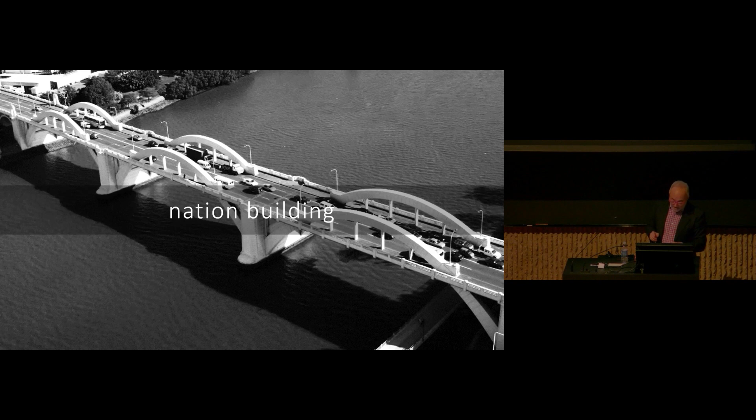But one also must consider that, in fact, the Sydney Opera House doesn't only come from that, but comes from the fact that a man called Manuel Hornibrook actually built this type of bridges in the 1930s in Australia. And it's by doing this type of work that for 30, 40 years, there was a building culture that was formed in Australia that not only, in a sense, responded to the challenges set up by Utzon, but nurtured that particular process.

And so I guess this is my conclusion. And while I was coming here by car, I looked at some of the things that we published. There is one thing that came out 2 days ago for the anniversary of the building. And so I was trying to reflect on this, and I wrote just very few lines.

I think it's important to understand that the Sydney Opera House, particularly today, is the result of the vision of one man. But it is also, and from our point of view above all, the product of a building culture developed over the years at a particular juncture in the history, and therefore the socio-technical history of a country. And that is actually proved by the incredible relationship that exists between architectural design and the worksite, the shop drawings documentation that was produced for the building. And I think this is the relationship that makes the building, the experience of the building, memorable.

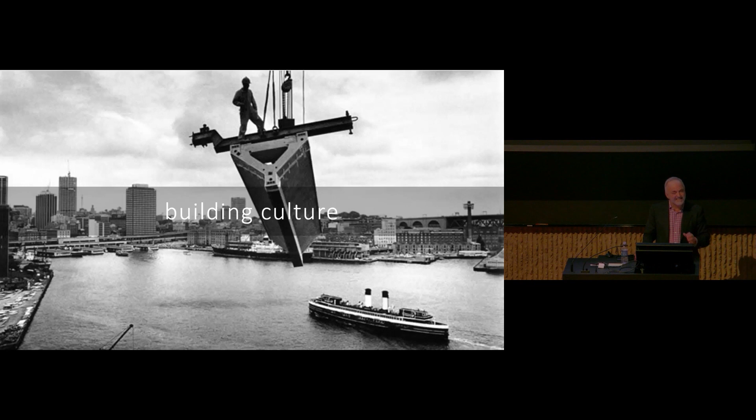So while the visionary quality of the drawings of Utzon and their inevitable technical translation by Arup look towards a future yet to be defined in detail, but very seductive, enthusing, intoxicating in its originality, the industrial practices that I showed you, that are contained in the shop drawings of Hornibrook, the builder of bridges, are the reflection of the society that built all of them.

The reflection of a society where all these bridges, all this work belongs. And of course, by that, also the constructive challenges that society had to meet until that moment to grant form to the infrastructure necessary for the country. And I think this is the tension, the autonomy, the complementarity of these different yet converging dimensions, the architectural, the constructive, the structural, that constitutes the kernel of what we are here to celebrate today.

And that is, maybe involuntarily, I would say the ratification. Ratification is not the right word, but I don't have another one. Anyway, the importance at that particular point in time of the attainment of a physical and cultural identity for the country that's called Australia, as well as its willingness to surpass it.

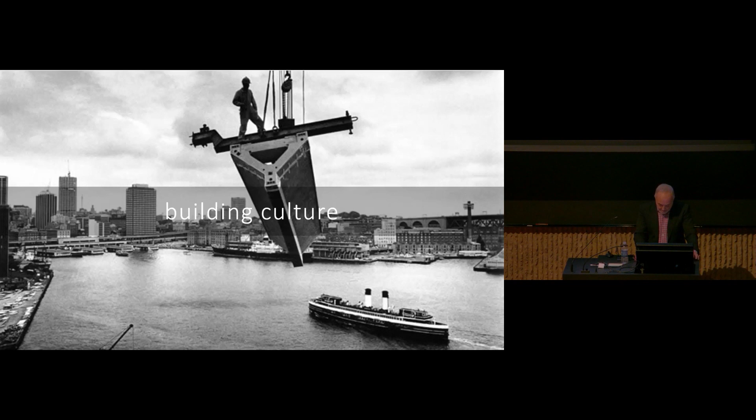And surpass it through the ideas of one visionary man, but also through the materialization, through the construction of the building, that for the ability to bring ambitions and reality together, deserves to become part of the heritage of all our professional worlds. Not only because of what it stands for, but because it gives us scope and hope for the future. Thank you very much.

Thank you, Paolo. I think you probably showed more working drawings in this room than have ever been shown in this room. And we have a few minutes for some questions if there are questions. Anybody? Questions for Professor Tombesi?

Hi, thanks so much for the talk. I'm curious, I don't know how much this is known, but I was curious about the attitude of the different contractors and Arup engineers in relation to such a challenging project. I'm sure there's so many different people involved, you can't speak on how all of them felt, but whether or not they were excited to take the reins after Utzon was fired, or whether it was placed on them without their willingness.